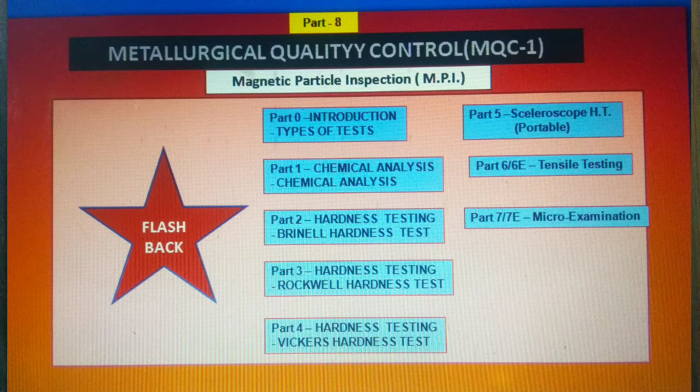Before I go to part 8, let me remind you of the earlier parts which I have already uploaded. Part 0 was introductory, part 1 was chemical analysis, part 2 was Brinell hardness test, part 3 on Rockwell hardness testing, part 4 on Vickers hardness testing, part 5 on portable hardness testing, part 6 on tensile testing, and part 7, the last part, was on micro examination. Please go through each part, otherwise you will not get the proper benefit from this presentation. So without wasting your time, I am coming to part 8 on magnetic particle inspection.

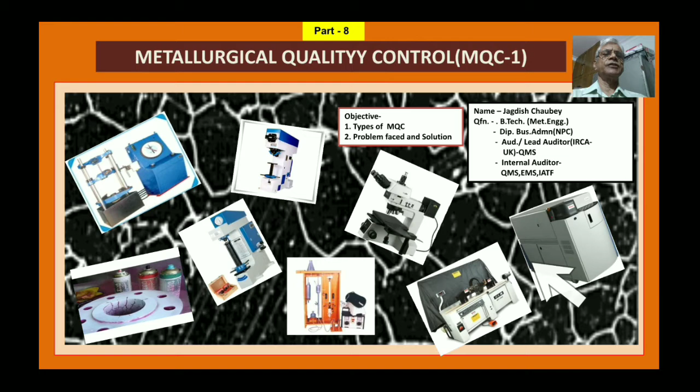The coverage is: types of MPI, test equipment used in this system, test methods and procedures, precautions to be taken during MPI, problems and possible solutions, and the last slide is on application and advantages of MPI.

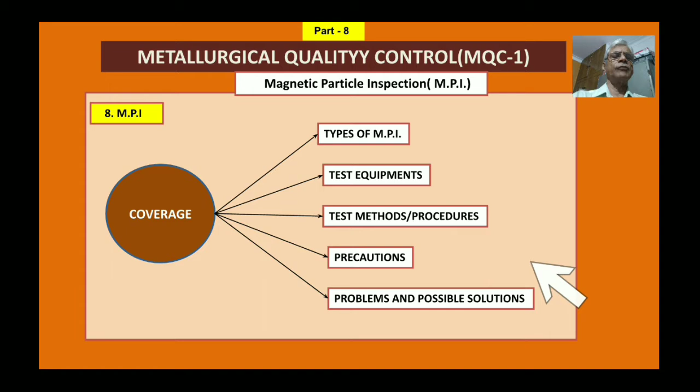So what is MPI? The definition of MPI is: magnetic particle inspection is a non-destructive testing process for detecting surface and slightly subsurface discontinuities in ferromagnetic material. The underline is ferromagnetic material, where this system is used. This is one of the non-destructive testing systems, where you can detect surface and slightly subsurface discontinuities in the material. So this is the definition of MPI.

Now, how does this work, what is the theory behind being able to see the crack? Suppose the test piece is there with north and south pole like this, and these are the lines of force, or magnetic flux, passing like this. But wherever there is a crack, they will jump like this - jumping takes place, and from this crack area, the magnetic flux will have a leakage, meaning it will go outside. So once it goes there on the surface, whatever magnetic powder you are spraying on this gets stuck up, because the powder is also magnetic, and this leaking magnetic flux attracts it.

So this will get stuck up, and you will see under ultraviolet light a particular crack in this direction. In this case also a similar thing, only here it is shown like this, and again the crack is slightly subsurface. Lines of force will be traveling around the jumping, and when it comes to the surface, it jumps like this. There is a leakage of magnetic flux, and this fluorescent powder gives a light green color, so you can recognize under ultraviolet rays that this is a crack. This is how the crack is detected and seen under MPI.

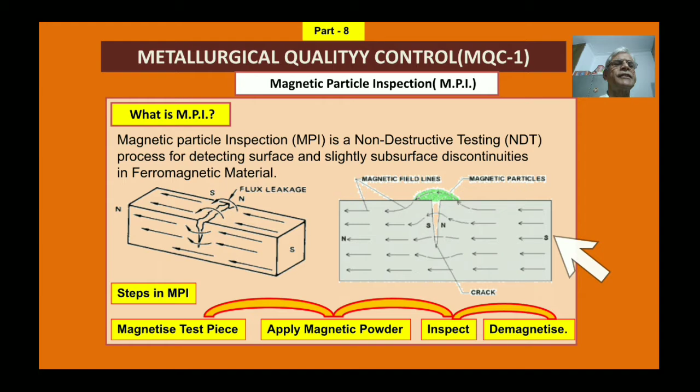Now, types of MPI, which I mentioned earlier. What are the types? First is dry technique, and the second is wet technique. In dry technique, you use a dry magnetic powder with colored pigments like red or black. Generally these colors are used, but in dry technique they are less sensitive to fine surface cracks. If the cracks are very fine in nature, then it is not that sensitive.

Whereas in case of wet techniques, you use a bath, called a magnetic bath, which is sprayed over the surface during magnetization. Fluorescent magnetic powder is suspended in an aqueous medium, meaning water, or in light petroleum distillate like kerosene oil. This is sprayed over there, and this wet technique is highly sensitive to even fine subsurface or surface discontinuities. So this is the difference between a dry technique and a wet technique.

Now the last point is a note. The aqueous suspension must contain some inhibitor and wetting agent to avoid rusting of the components. Why is it required? Because in aqueous solution, when you do magnetization and the piece is taken out, after some time it gets rusted because of the water content. So to avoid this rusting, you add an inhibitor or wetting agent so the piece does not get rusted after some time. This is a precaution you have to take when doing wet technique using this type of powder. That is the requirement for aqueous solution. And for fluorescent powder seen under ultraviolet light, there is no such problem.

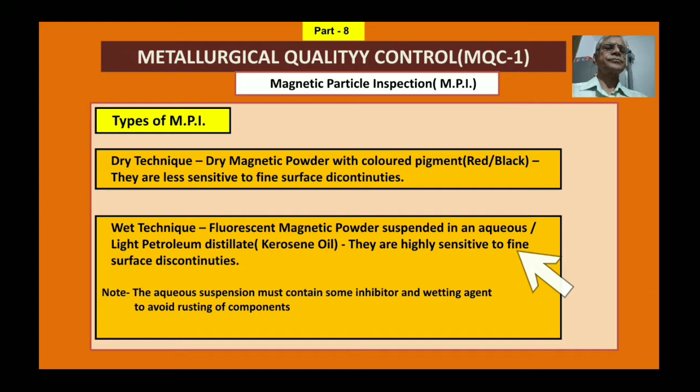Now I am coming to equipment. There are two types of equipment: one is fixed type, and the other is movable or portable type. These three shown here are all of portable nature. So I'll just describe in brief about this particular fixed one.

This is a particular machine where this tank is there. The bath is prepared here using kerosene oil. Generally kerosene oil is used, but sometimes now people are using water also. This bath is prepared along with the magnetic powder, and then the piece is fixed over here, and this is the foot pedal. When pressed, the current passes through, and this coil is there for a different type of magnetization. When you examine under ultraviolet, this ultraviolet lamp holder is there. Under this lamp, when you examine, if there is a surface crack it will glow like anything, like yellow or light green color, and you can detect it. This is how this system is done.

But everything here is done under a black curtain, done under dark conditions, so that the light and cracks are clearly visible. If you do it under daylight condition, it will take time to recognize the crack. So it has to be done under dark light conditions, and for that this curtain is made.

Now I come to this. This is a prod type of magnetization. This is the total power supply system, and these are the various pipes connected to the prods. These are the two prods in his hand. He is examining some weld surface. You have to keep these prods under specific spacing so that the crack comes in between. Here we are generally using dry powder, red or black color. When you magnetize it, the magnetized powder will come on the crack, and you can see with the naked eye whether it's red or black powder.

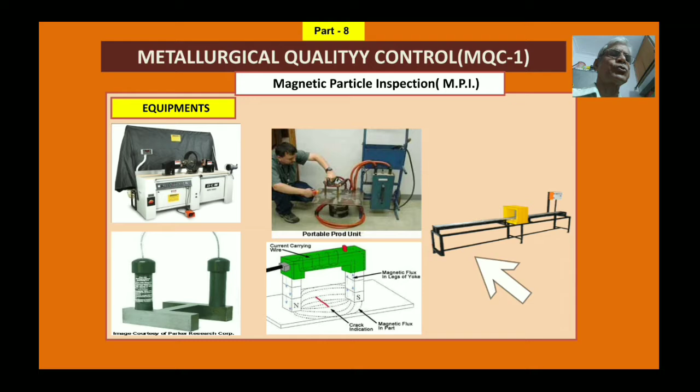You have to pass this piece - there is a rectangular hole here. You have to pass it 1 or 2 times just to see whether it is totally demagnetized or not. But how do you confirm it is demagnetized? There is a separate instrument called a field indicator, which I will describe in coming slides.

This is a very clear picture. Now, earlier I told you that you have to magnetize it. There are 2 types of magnetization, mainly circular and longitudinal, and the third one is a combination of both, circular and longitudinal.

This is Ampere's thumb rule. You see, where this thumb is there, the current direction is in this direction. So it is said that if the current is passing like this, the magnetic field will develop just 90 degrees away. Or if the magnetic field is 90 degrees, the current will pass in the vertical direction. This is one of the techniques used for this.

Here again, this is called circular magnetization, and this will reveal longitudinal cracks, meaning horizontal cracks. In this case, the current is passed over here, and as I told you with the Ampere's thumb rule, it will develop a magnetic field like this - circular magnetization. So this field is called circular magnetization, and then if the crack is here, it will appear here. One thumb rule: whatever the direction of the current is, the crack will show in that particular direction. You have to remember this. So this is circular.

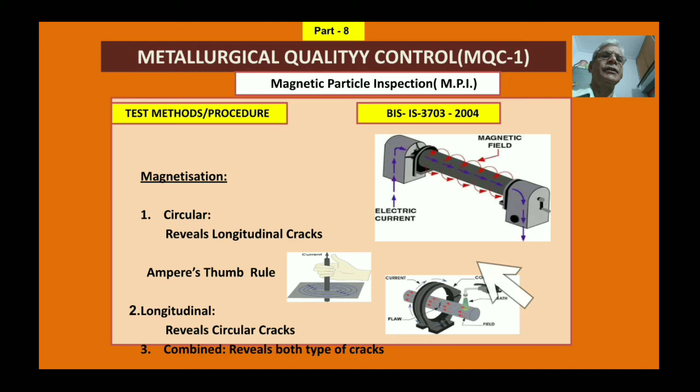Then I come to type of current. As shown in the previous slide, you have to pass current, but what are the current types? Basically AC current is mostly used in MPI, however it reveals only surface cracks. Generally we use AC current, but this reveals only surface cracks - it doesn't go deep into subsurface cracks. It can reveal surface cracks, and generally this is used in most cases.

Then there is direct current. This generates a magnetic field that penetrates deeper into the material. So if the crack is slightly subsurface, it will reveal the subsurface crack also, when you are using direct current.

Then there is a third type of current, rectified alternating current, because the source is AC, but you put a rectifier which converts AC into DC, and then you check. Again, this can reveal both surface and subsurface cracks. And the last one is half wave DC. It is basically for detecting subsurface discontinuities, and it is very good - the depth of surface it can reveal is quite high compared to these three processes when using half wave DC.

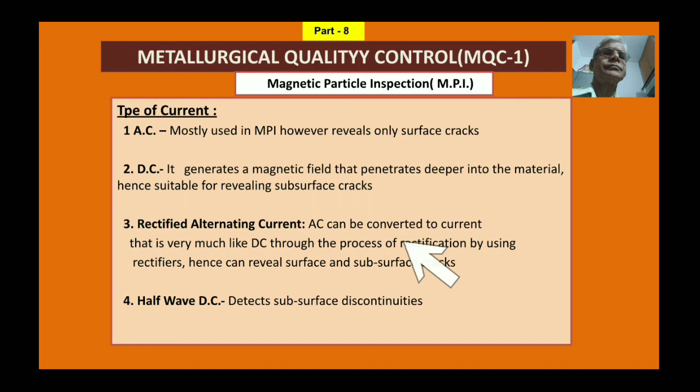Now methods. What are the methods? There is one method, wet method. In wet method also there are two types, and the other method is dry method.

In wet method, there is continuous magnetization. This method is done because you are magnetizing the piece, passing the current, and at the same time spraying the magnetic bath simultaneously, continuously. But in case of residual, first you magnetize the piece, then you spray the bath on the test piece just to see the crack under ultraviolet rays.

Now about magnetic powder, this fluorescent coating is nothing but a coating of phosphorus, and when you see it under ultraviolet light, it glows like anything, yellow or light green color, so you can easily recognize if the crack is there or not. In case of continuous method, you are using colored particles, generally red or black particles, for residual magnetizing as well as continuous magnetizing. You can use this powder, red or black, and it can be seen with naked eyes. That is the difference, whereas for fluorescent powder, you can see it only under ultraviolet light.

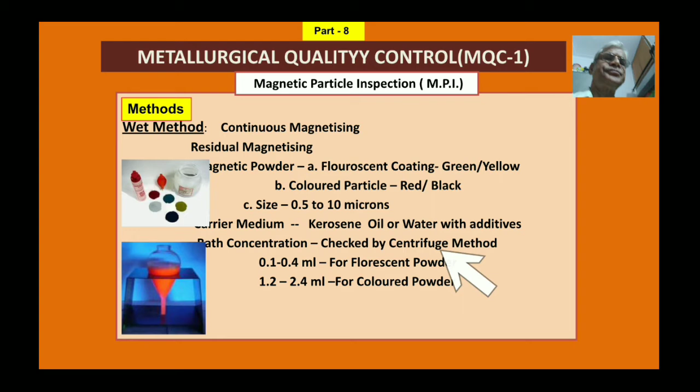Now that was the wet method. Now I come to the dry method. In this, dry particles are dusted on the surface of the test object as the item is magnetized. You put this dry powder, whether black or red, using a particular bulb type applicator, similar to a rickshaw horn bulb used for an alert siren. You press it and it sprays on the part, so you magnetize it and then press it.

This way, dry particle inspection is well suited for inspection conducted on rough surfaces. The primary applications of dry powder are unground welds and rough as-cast surfaces. This dry method is generally used for heavy castings, rough surfaces, and welding, including heavy weldments, which cannot be put on a fixed machine because of their weight.

So in this case you have to use the prod technique or movable technique, and there you use dry powder, either black or red, and then you can see the crack.

Now dry particle inspection is also used to detect shallow subsurface cracks, as I explained earlier. Dry particles with half-wave DC, which I've also explained, is the best approach when inspecting for lack of root penetration in welds. For welding, whether the root is penetrated well or not, and if there is any crack, it can be seen only with half-wave DC. Otherwise you cannot see it.

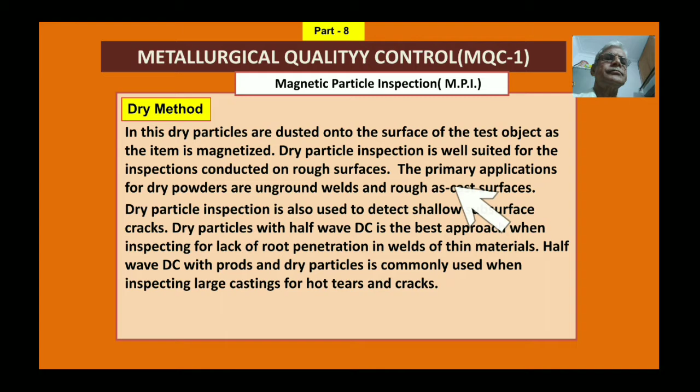Current requirement - what is it for? Because to magnetize a piece, you have to pass current. In case of circular magnetization, you pass 250 ampere per centimeter or 500 ampere per inch. Whatever the job thickness is, if the diameter of the job is around 1 centimeter, you use 250 ampere current.

That's circular magnetization. For longitudinal magnetization, you consider the L by D ratio; if it's 2 to 15, you use ampere turns. There's a meter called KAT, kilo ampere turns. The formula is 45,000 kilo ampere turns divided by L, the length of the part into diameter. This gives you the current needed on the K80 meter for magnetizing.

For circular magnetization using prods, for parts up to 19 millimeter thickness, use 3.5 to 4.5 ampere per millimeter of prod spacing. For parts more than 19 millimeter thickness, use 4 to 5 ampere per millimeter. Prod spacing is very important and generally ranges between 50 millimeter to 200 millimeter, so depending on prod spacing, you use various amounts of current.

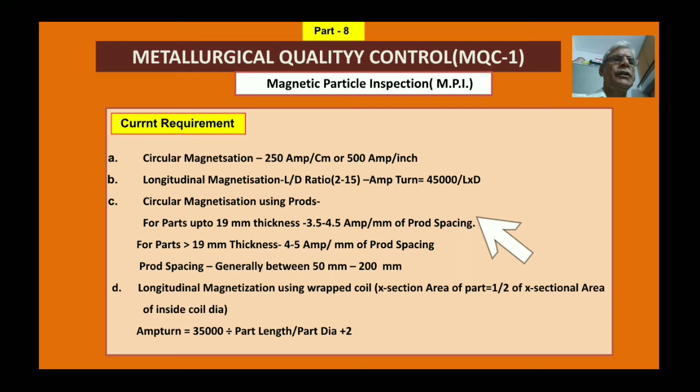Now I'll show you some inspection tools used to verify whether this machine is okay, whether the system is working effectively, and whether it is showing cracks or not. The first tool is the pi gauge.

The pi gauge is basically an octagonal shape steel plate, with the top area copper plated with artificially created cracks. You take this, magnetize the piece, put it flat on the surface, then pass the current and magnetize it. If the cracks are seen, your strength, current, and everything is okay, and the machine is working perfectly. If not, something is wrong - either the salt bath strength or current requirements are not proper. This is for particular examination and needs to be verified time to time.

This is also part of calibrating the machine, which is an important part. Depending on your workload, you have to check and verify this system weekly, fortnightly, or even monthly.

Then there is Keto's ring. You see these different black holes with different depths - maybe 0.1 millimeter, 0.2 millimeter, 0.3 millimeter. When you keep it in place, and if this is shown, it means it can detect even a 0.1 millimeter subsurface crack. This is for the subsurface case, and it can easily verify under what depth you can detect the crack.

Now the last one is this field indicator. As I told you in the beginning, you have to use a demagnetizer at the end. So how do you confirm it has been demagnetized? This is the field indicator used for that. You put this field indicator on the test piece and it should show 0. If it shows left or right, it means it's not properly demagnetized, and you have to pass that piece again 2 or 3 times and confirm again whether it is demagnetized or not. Why it is required, I will tell you in the next slides.

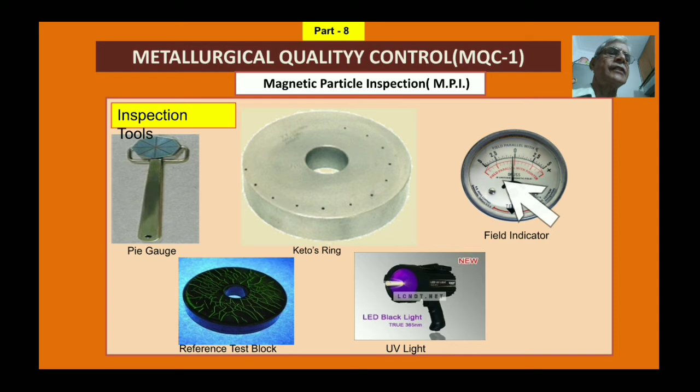Now I am showing some of the typical appearance of the cracks. This is under weldment condition. The weld beads are there. Again, if you are putting a lot of powder, it will confuse also.

In this case, under this particular dry powder condition, using half wave DC, you can see even subsurface crack also. It's not visible, but you see this dark area. Maybe this is the crack which is seen.

So you can see even subsurface cracks also. This is dry powder, red color dry powder, used in the continuous method. The solution is made out of this, and then you see this crack appears like this, under ultraviolet rays, with fluorescent powder which you have used.

Again, this will shine like anything. So you see this is the crack, very clearly seen. Similarly, here also same thing, and here also you see this slightly light green color. In this also yellow and light green color. So this way you can easily recognize whether this is a crack or something else.

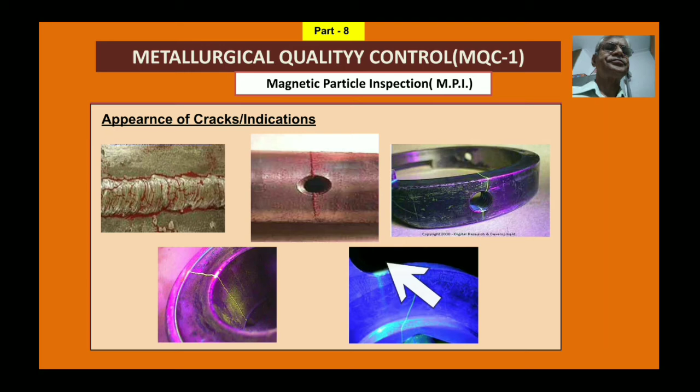Now demagnetization. I was telling you why you have to demagnetize. This slide explains this. After conducting a magnetic particle inspection, it is usually necessary to demagnetize the component, because if some amount of magnetic field remains in the part, it can cause the following things.

Number one, it can affect machining by causing chips to cling to the component. If the part has not been properly demagnetized, when you are machining it, whatever chips are coming will stick to the part, and it can cause damage, maybe severe scratch marks. So this is one of the disadvantages, that you should not have a magnetic field after doing this.

So you have to do demagnetization. The second issue is it can interfere with electronic components such as a compass. In this case also it can reflect differently if the piece is not properly demagnetized. Then the third one is it can cause abrasive particles to cling to bearing or faying surfaces and increase wear.

Again, if you are using some bearing or something and it has not been properly demagnetized, this will attract some of the parts within that assembly system, and that will act as abrasive particles. It may spoil the system, maybe stop the working of the assembly or bearing where it is fitted, and cause a halt to the total system. So with these disadvantages, you have to remove magnetization.

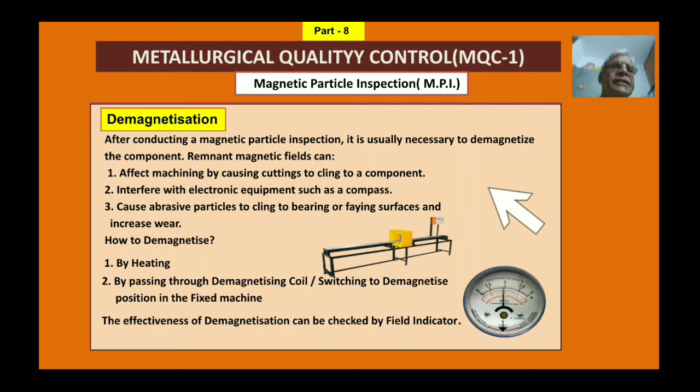So the effectiveness of demagnetization can be checked by the field indicator. This I have explained to you.

Now, what are the precautions that have to be taken? In case of fixed equipment and continuous wet magnetization, always place a copper shield at the ends to avoid burning of the test piece in case current is higher.

So in this fixed case, as you have seen earlier in that photograph, you have to place a copper shield also. It will protect the piece if the current is very high. Otherwise, the piece will have a burning mark at the end, and it will damage the appearance of the part. It may cause even fire sometimes.

If the current is high and you have not put any copper shield, there will be a spark, and because of the vapors, which is kerosene oil vapor, it may catch fire also. So you have to take precaution.

Then bath strength and current used must be verified by a pie gauge before starting inspection. This I have also explained, that you have to confirm the bath strength and current, whether this machine is working all right or not, through this pie gauge system, by checking the cracks which are artificially created.

Then the test piece must be fixed rigidly, otherwise it may cause a spark. Again, this is a prime requirement.

The test piece has to be fixed, though they are fixed pneumatically with a lot of jerks. But even if something is left, you have to confirm that they are fixed very rigidly.

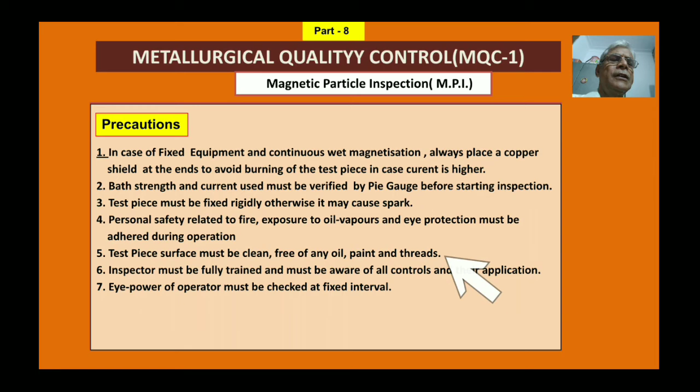The eye power of the operator must be checked at fixed intervals, because they are constantly watching something, so their eye power may get reduced, or sometimes they already have lower eye power and that gets more damaged. So it is required that they be checked, maybe six-monthly or yearly, through a particular doctor, and if their eye power is less, they should not be allowed to check the MPI system. This is also a very prime requirement.

Now, what are the problems being observed and what are their solutions? The first one is surface cracks or indications not visible. It happens sometimes that you are not finding it. In that case, you have to ensure the bath strength is okay, whatever bath you have made, and then verify with the pie gauge whether cracks are visible or not. If cracks are visible and you check again and something is wrong, you have to make a fresh bath, check the current requirement, and check it again. This is one solution.

Point two: only horizontal cracks observed and not vertical or radial cracks. This depends on what type of magnetization you are doing - longitudinal or combined magnetization. If you are doing circular magnetization, you can see only horizontal cracks, not vertical cracks. So you have to take care of what magnetization you are doing. If you do combined magnetization, it can reveal both circular and longitudinal cracks, and sometimes radial cracks too. This is the advantage of combined magnetization.

Then, bath color appears white under UV. This is also one of the things that happens, and I have experienced this personally. Sometimes the bath gets a white or milky color even though you go on using it continuously. Why does it get milky? Because of continuous use it gets adulterated with various outside elements, and then it gets milky color. So you should not continue using it - you have to change it.